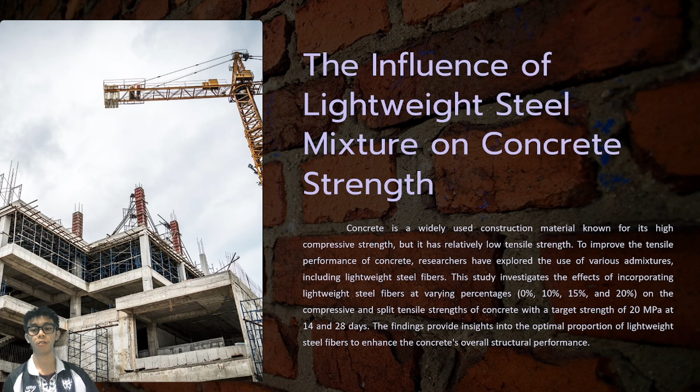Okay, experimental methodology. Material characterization. The study began with a thorough investigation of the physical and mechanical properties of the concrete constituents, including fine and coarse aggregates, cement, and the lightweight steel fiber. These tests were conducted in accordance with relevant ASTM standards to ensure the materials met the specified requirements.

Second, mixture design. The concrete mix was developed based on the principles outlined in SNI 7656:2012, which is an adaptation of the ACI 211 method. The required quantities of each ingredient, including water, cement, fine and coarse aggregate, and the varying percentage of lightweight steel fiber, were determined for the 28 concrete cylinder specimens.

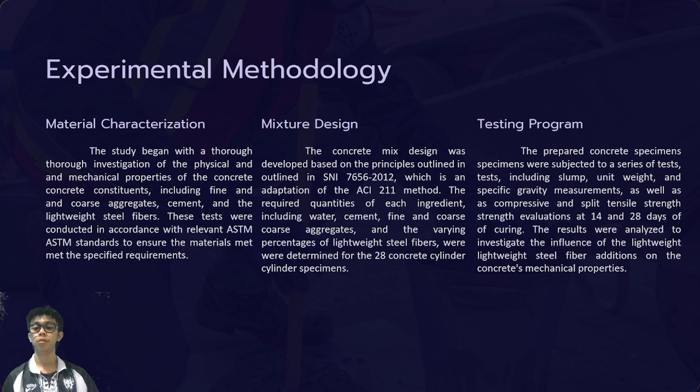Third, testing program. The prepared concrete specimens were subjected to a series of tests, including slump, unit weight, and specific gravity measurement, as well as compressive and split tensile strength evaluation at 14 and 28 days of curing. The results were analyzed to investigate the influence of the lightweight steel fiber addition on the concrete mechanical properties

and material properties. First, fine aggregate. The fine aggregate used in the study was thoroughly tested to ensure compliance with the ASTM specification. The result showed that the fine aggregate had a low silt content of 2.63%, a unit weight of 1.302 kg per liter in the loose state and 1.592 kg per liter in the compact state, and a specific gravity ranging from 2.47 to 2.94, all of which met the required standard.

And coarse aggregate. The coarse aggregate also underwent extensive testing, including measurement of unit weight, absorption, and abrasion resistance. The results indicate that the coarse aggregate had a unit weight of 1.288 kg per liter in the loose state and 1.481 kg per liter in the compact state, an absorption of 1.97%, and a Los Angeles abrasion value of 20%, all of which were within the acceptable limits.

Next, lightweight steel fiber. The lightweight steel fibers used as the admixture in the study were carefully selected and characterized to ensure their compatibility with the concrete mix. Their physical and mechanical properties were thoroughly evaluated to understand their potential impact on the concrete performance.

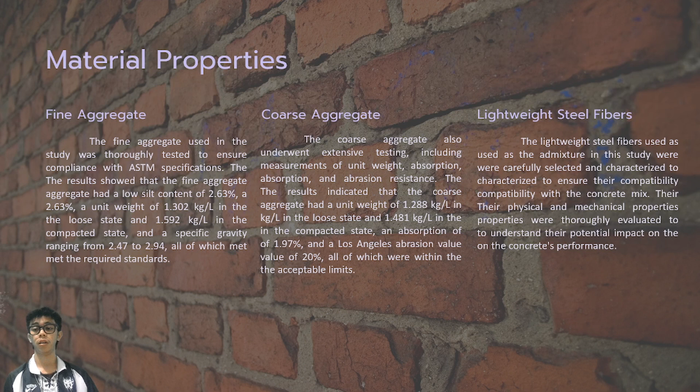Workability and density. 1. Slump test result. The initial slump test on the plain concrete mixture indicated a value less than the target of 75 mm, prompting the addition of extra water to achieve the desired workability. The slump values for the concrete mix with 0%, 10%, 15%, and 20% lightweight steel fiber addition were all maintained at 80 mm through the appropriate adjustment of the water content.

2. Unit weight. The unit weight of the concrete specimens was measured, and the result showed that the concrete with 15% lightweight steel fiber addition had the highest unit weight of 2,355.96 kg per meter cubed, while the 20% fiber concrete had the lowest unit weight of 2,289.97 kg per meter cubed. The variations in unit weight were attributed to the difference in the fiber content and the corresponding impact on the concrete density.

Okay, specific gravity. The specific gravity of the hardened concrete specimens was also determined, with the 15% lightweight steel fiber concrete exhibiting the highest specific gravity of 2,310.38 and the 20% fiber concrete having the lowest at 2,244.34. This difference in specific gravity reflects the change in the concrete composition and density due to varying fiber contents.

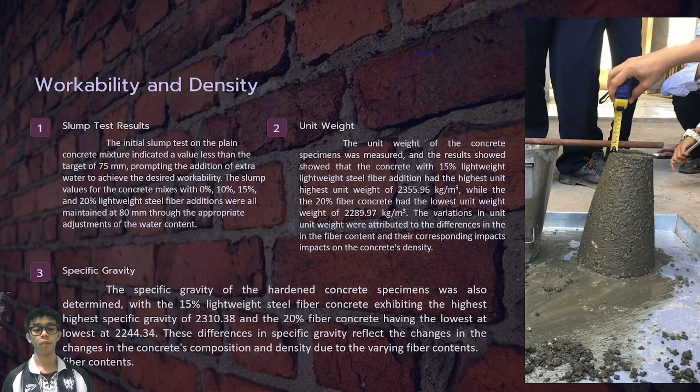Compressive strength result. 14th-day compressive strength. At 14 days of curing, the concrete with 15% lightweight steel fiber addition had the highest compressive strength of 12.162 MPa, representing a 43.33% increase over the plain concrete strength of 8.485 MPa. The 10% and 20% fiber reinforced concrete also exhibited compressive strength improvements of 40% and 10% respectively compared to the control mix.

And 28-day compressive strength. At 28 days, the plain concrete without any fiber addition had the highest compressive strength of 13.859 MPa. The 10%, 15%, and 20% fiber reinforced concrete saw a decrease in compressive strength of 40.82%, 14.29%, and 48.98%, respectively, compared to the control mix. This suggests that the lightweight steel fibers were more effective in improving the early age compressive strength rather than long-term performance.

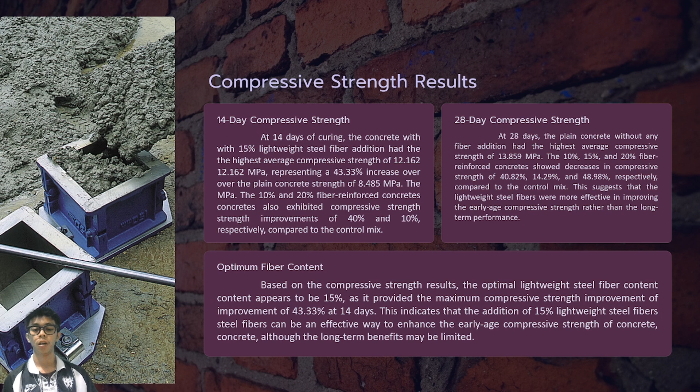Optimum fiber content. Based on the compressive strength result, the optimal lightweight steel fiber content appears to be 15%, as it provides the maximum compressive strength improvement of 43.33% at 14 days. This indicates that the addition of 15% lightweight steel fiber can be an effective way to enhance the early age compressive strength of concrete, although the long-term benefit may be limited.

Split tensile strength evaluation. Tensile strength at 14th day. The split tensile strength test conducted at 14th day revealed that the concrete with 10% lightweight steel fiber addition had the highest average split tensile strength of 2.183 MPa, representing a 24.09% increase over the plain concrete tensile strength of 1.759 MPa. This suggests that the addition of 10% lightweight steel fiber can effectively improve the concrete early age tensile

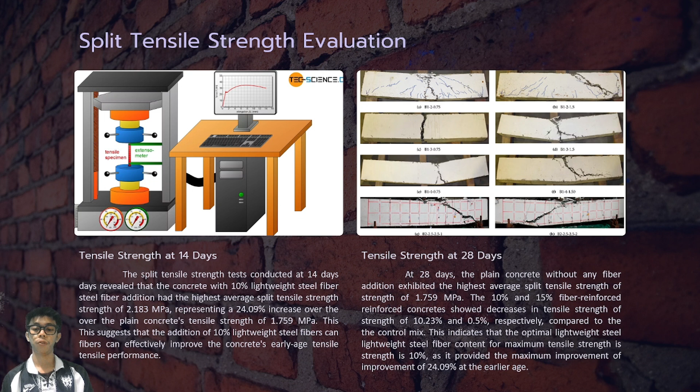performance. And then tensile strength at 28 days. At 28 days, the plain concrete without any fiber addition exhibited the highest average split tensile strength of 1.759 MPa. The 10% and 15% fiber reinforced concrete saw decrease in tensile strength of 10.23% and 0.5% respectively compared to the control mix. This indicates that the optimal lightweight steel fiber content for maximum tensile strength is 10%, as it provides the maximum improvement of 24.09% at the earlier age.

Influence of fiber addition on strength properties. First, compressive strength. The incorporation of lightweight steel fiber had a significant impact on the concrete compressive strength, particularly at the early age of 14th day. The 15% fiber addition exhibited the highest compressive strength with a 43.33% increase compared to the plain concrete. However, the long-term compressive strength at 28 days was highest in the control mix without any fiber addition.

And tensile strength. The split tensile strength of the concrete was also influenced by the addition of lightweight steel fiber. The 10% fiber content provides the maximum tensile strength improvement of 24.09% at 14 days, indicating that this proportion is optimal for enhancing the concrete early age tensile performance. At 28 days, the plain concrete exhibited the highest tensile strength. And density.

The variation in the lightweight steel fiber content affected the density of the concrete specimen. The 15% fiber reinforced concrete had the highest unit weight and specific gravity, while the 20% fiber concrete had the lowest, suggesting that the fiber addition can influence the concrete overall density and compactness.

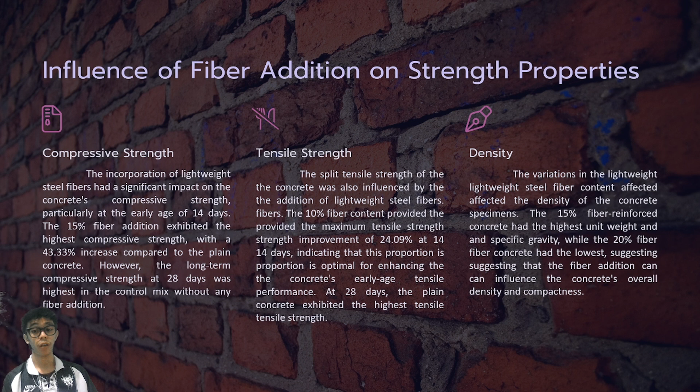Practical implication. First, early age strength improvement. The study findings demonstrate that the addition of lightweight steel fibers, particularly at the 15% level, can significantly improve the concrete compressive strength during the early stage of curing. This could be beneficial for construction projects where early strength development is crucial, such as precast concrete elements or fast-track construction.

2. Optimizing tensile performance. The optimal 10% lightweight steel fiber content was found to provide the maximum enhancement in the concrete split tensile strength at 14th day. This information can be valuable for structural applications where the concrete needs to resist tensile stresses, such as in flexural members or tensile dominant load cases.

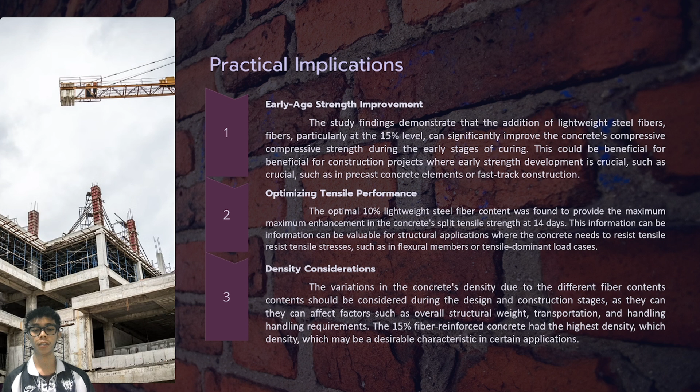3. Density consideration. The variation of the concrete density due to the different fiber contents should be considered during the design and construction stage, as they can affect factors such as overall structural weight, transportation, and handling requirements. The 15% fiber reinforced concrete had the highest density, which may be a desirable characteristic in certain applications.

For limitation and future research. Limitation, limited fiber variation. Explanation. The study only investigates three specific fiber content percentages, 10%, 15%, and 20%, which may not have captured the full range of potential strength improvement. Future research could explore a wider fiber proportion to identify the optimal blend more precisely.

Limitation, single concrete strength grade: the research focused on the target concrete strength of 20 MPa, which may not be representative of all concrete applications. Evaluating the influence of lightweight steel fiber on concretes of different strength grades would provide a more comprehensive understanding of

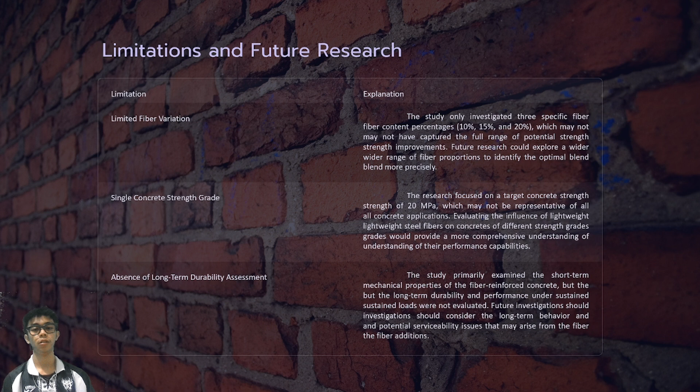their performance capabilities. Limitation: absence of long-term durability assessment. The study primarily examined the short-term mechanical properties of the fiber reinforced concrete, but the long-term durability and performance under sustained loads were not evaluated. Future investigation should consider the long-term behavior and potential serviceability issues that may arise from the fiber addition. Okay,

conclusion and recommendation. First, key finding. The study demonstrated that the incorporation of lightweight steel fiber can have a significant impact on the concrete compressive and split tensile strength, particularly at the early stage of curing. The 15% fiber addition provides the maximum compressive strength improvement of 43.33% at 14 days, while the 10% fiber content results in a 24.09% increase in split tensile strength at the same age.

2. Practical implication. The findings suggest that the strategic use of lightweight steel fiber in concrete can be beneficial for applications where early-age strength development is crucial, such as in precast elements or fast-track construction. The 10% fiber content can also be advantageous for enhancing the concrete tensile performance in flexural or tensile dominant structural members. Last, future research direction.

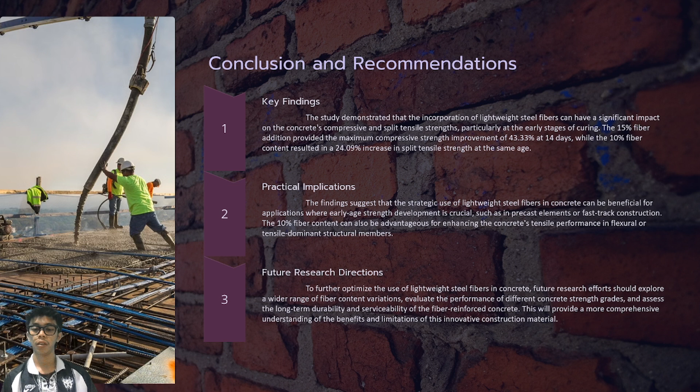To further optimize the use of lightweight steel fiber in concrete, future research efforts should explore a wider range of fiber content variation, evaluate the performance of different concrete strength grades, and assess the long-term durability and serviceability of the fiber reinforced concrete. This will provide a more comprehensive understanding of the benefits and limitations of this innovative construction material.